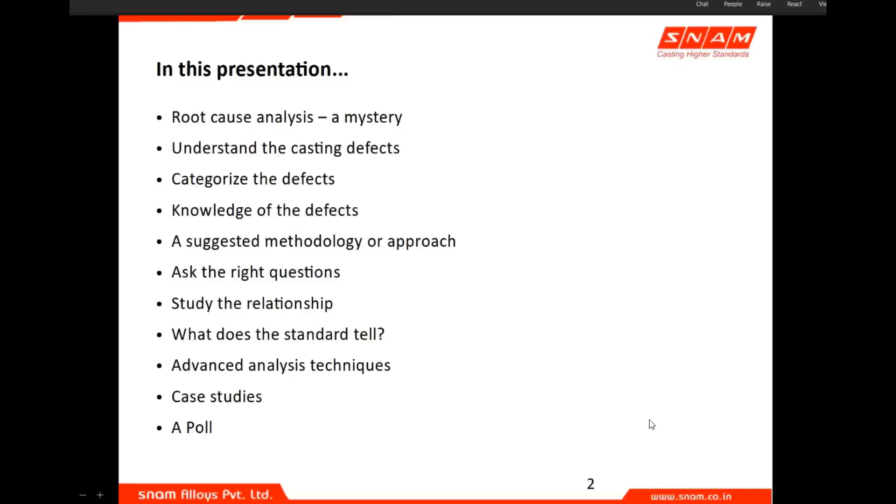And root cause analysis, the mystery. The reason why we call this mystery is because it is mostly considered to be person perspective. Say, for example, I think that this problem is caused by this root cause. So I start becoming confirmation bias.

See, the word confirmation bias means I decide that this is the most possible, or this is the most favorable thing which I decide with my intellectual knowledge. So I try to gather or grab all the information justifying that statement.

So if I do a root cause analysis, then what I think as the best cause becomes the major cause. If somebody else does the root cause analysis, what he or she thinks as the major cause becomes the most important cause. But it is actually not that, because the defect is not person sensitive.

And the casting process involves a lot of science inside, a lot of mathematics inside. A lot of chemical reactions, lot of physical interactions happening during solidification, during pouring, and the entire process scenario. So there is a lot of complexity in the process.

That is the reason why arriving at a proper root cause to solve a problem is always becoming difficult for any foundryman. If people have started their career as a recent foundryman, they find it very difficult because of the complexity in the process, and the basic knowledge they lack or have not acquired is making it more difficult for them to understand the defect and then take action.

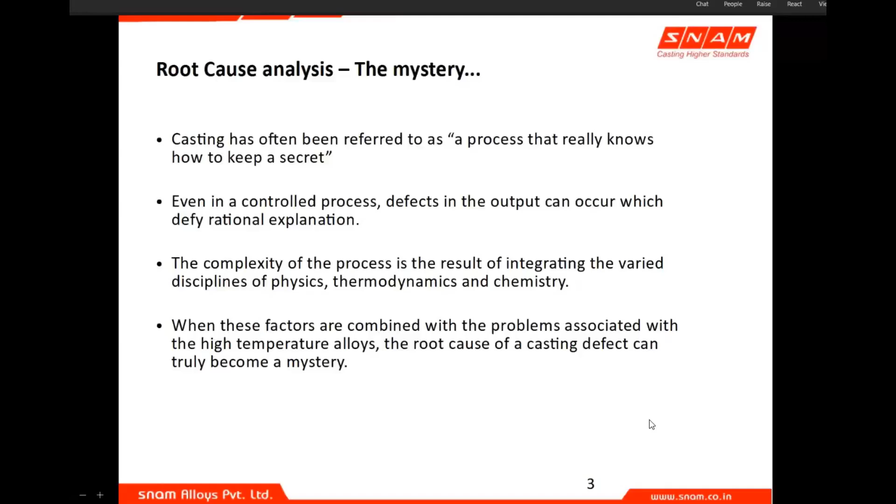And you have to understand the defects first. For example, when you want to solve something or when you want to set something right, then you should know what that is actually.

Sir, I'm getting an echo.

Okay, thank you. So casting defects are always very difficult to characterize because it's person sensitive or experiential knowledge sensitive. Say I call this as sand inclusion. I'm the most experienced person in this organization. I expect everybody else to just listen to me, and everyone should call that as sand inclusion only.

Or even if somebody else has got a different thought, I don't expect or encourage them to come up with their difference of opinion, telling that, sorry sir, I differ from you. This might be a different thing.

Or other way, with the experiential knowledge I've gathered so far, I always categorize whatever I look at or want to classify as a defect in the same way. For example, anything looking dull, I can call it as a short pour, a cold metal, or a cold lap. So I try to characterize the way I know.

But the problem is most of the defects are not just due to one cause, or it is not just one defect, one cause causing one defect. One cause might be causing multiple defects. There can be 2 or 3 defects combined together. One defect could have led to the formation of the other defect.

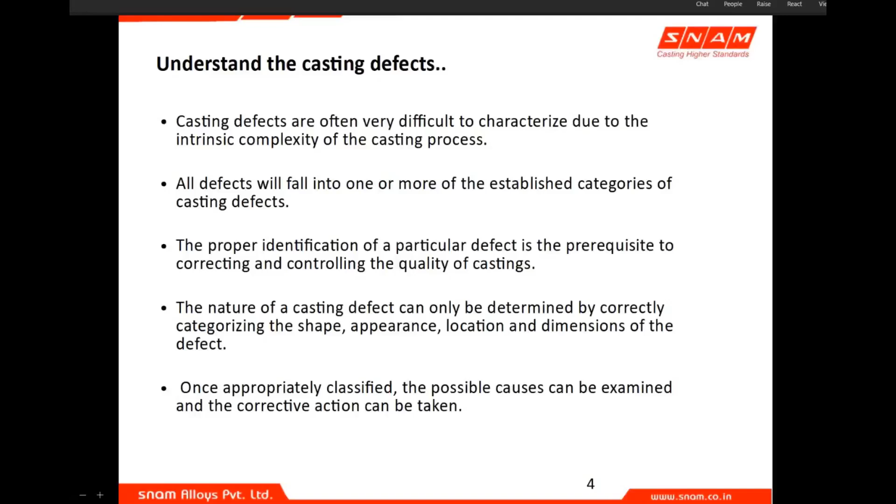Most defects generally fall into one of two categories. There are some similarities, some dissimilarities, opposites as we call them. So it is always best to understand the defect. To understand the defect, first you should know how to categorize it, so we can make a major classification between defects.

I'm not going to talk about sand defects, mold defects, metal defects. Any defect that comes up will be categorized as a chronic defect - meaning long standing, which keeps coming every time, a seasonal defect, or one that is prevalent for a quite amount of time.

But the other defect is random or uncommon. We often make a wrong assumption that some random defects are chronic defects, expected to happen again, and we start considering a random defect as a chronic defect. Sometimes you should just let the defect go.

Maybe the next day the defect might disappear, but that does not mean you should not do a root cause analysis. The way you treat a chronic defect versus a random or uncommon defect should be different. Standard set procedures need to be arrived at, because chronic defects are generally time bound, seasonal, process related, but random defects are not that way. Both categories should be addressed differently, but with set procedures.

So if a defect occurs, measures must be adopted to eliminate its cause and prevent its repetition. That is the baseline with which we should start any action.

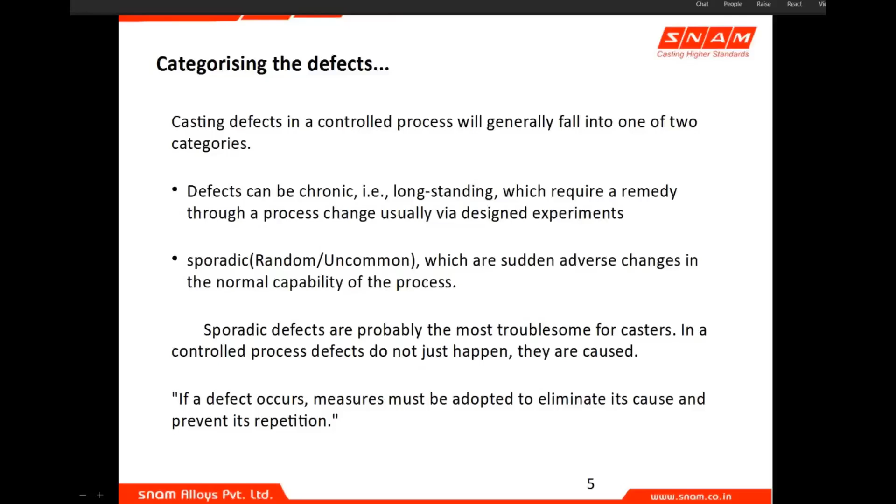Say your return sand temperature has increased today. So today you try to add some water, control or reduce the sand temperature for just the day or just the shift, and you run your foundry. This increase in sand temperature might lead to some other defect, like less strength in the mold, leading to erosion in the mold while filling. So you start getting sand inclusions, then other related defects. The strength of the mold comes down, very remote location shrinkage can come up. So one cover up can lead to multiple defects. We should always target understanding the cause of the defect, eliminate its cause, and prevent its repetition.

So some more about random or sudden defects - there are two journeys you should take in sporadic defects. Sporadic means uncommon or random defects, because chronic defects are, for example, during monsoons my humidity in the air is going to be high, so my moisture content in the mold is going to be high. So there is a high chance of all gas related defects. I take special actions such that I keep moisture in the mold less, and I preheat my ladle more, because there is going to be loss in temperature. So chronic defects, with experience, with learned knowledge, with textbook knowledge available, we can to some extent attack or control.

Because when the monsoon starts, I have an action plan already ready. I'll preheat my ladle twice.

I'll reduce my moisture, checking at increased intervals. I keep checking the moisture content in the mold, and I keep checking the permeability of the mold. So I've got action plans. But for this uncommon defect, I do not know what to do.

It might happen today. The moment I leave my foundry, my operator, or the second shift or third shift operator might call me telling that, sir, suddenly a defect has occurred. So for these random or sudden defects, we have got two journeys.

First is the diagnostic journey. That means you should understand the symptom, and that symptom should lead to a cause. The second journey is the cause to remedy.

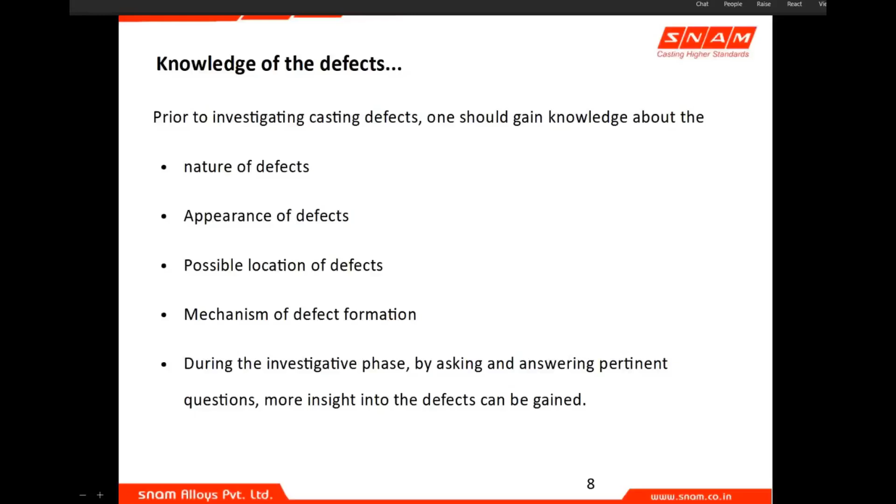So let us come to a typical methodology to approach a solution for foundry defects. You have identified the problem - problem identification is the first step. Who identifies the problem, how the problem is identified, plays a major important role. So the first thing is you identify the defect or the rejection, then you write the problem description.

Any wrong identification or wrong problem description leads to different scenarios. A problem description should involve every aspect of the defect - when did the defect come, when was it found, how much is the defect, what is the severity of the defect, in how many places it has occurred, since when it is being observed. So a detailed description of the defect is needed.

You would have seen some reports of doctors where you have got a small summary that takes up everything. Say for example you meet with a small accident - hopefully nothing like that should happen - you go to a doctor for first aid, and the doctor starts asking you whether you're feeling giddy, are you feeling pain in any part of your head, do you have any bleeding from your ears, or do you have any breathing difficulty. So these kinds of questions come up and they record everything. The report will tell that okay, this person came at 9:39 a.m., these are the questions asked, these are the answers given by the patient, and it will be recorded.

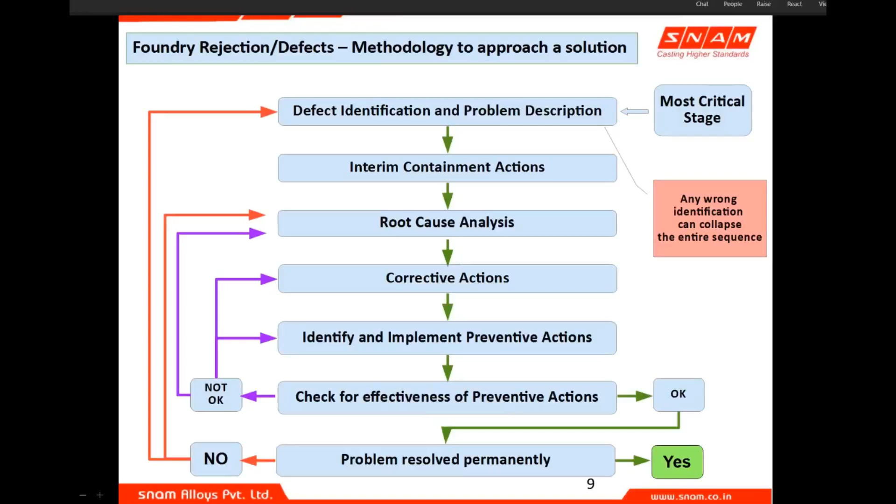You are going to have a team where the problem description is to be understood by the entire team, and a group of minds are going to work in solving a problem. If you think you are the only person who can solve all the problems, that is not possible, because if you start thinking in that way, then you become the biggest problem in solving the problem. So the problem description is to be made in such a way that anybody who is going to become a part of that problem solving team is going to understand the exact picture the way you have understood it.

Okay, next comes the interim containment actions. So you have identified...

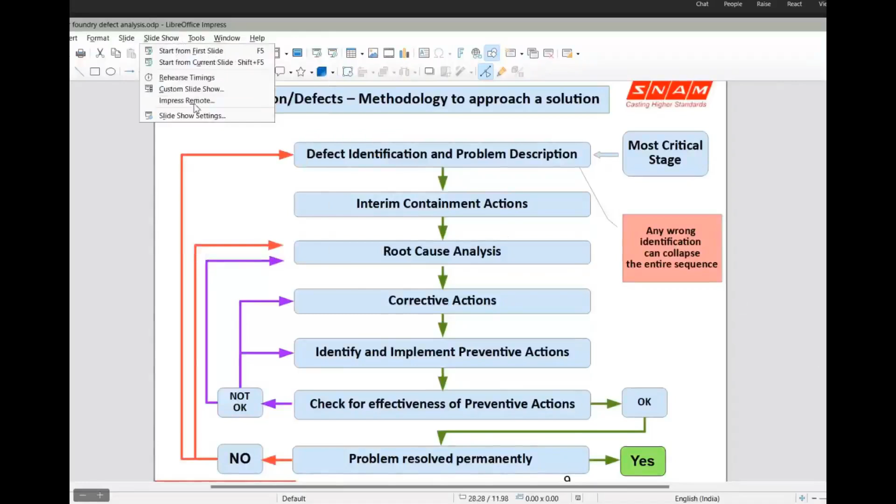Okay, fine, yes sir. Okay, so next comes the containment actions. A defect has occurred, you identified the defect and you made the problem description, everything is available. But you should act immediately, because you cannot keep your process continuously producing rejection. You take an interim containment measure, you stop pouring or you segregate all these castings. That is just to ensure that the further processed item is not getting affected. So that is not the solution. You understand? Removing this defect or slowing down the further causing of defect is not the solution.

So this is called containment action. Say, for example, you found suddenly very high magnesium or poor nodulity identified in one particular pouring. What you do is you immediately cut down, you move all the castings outside the line so that it does not get messed up.

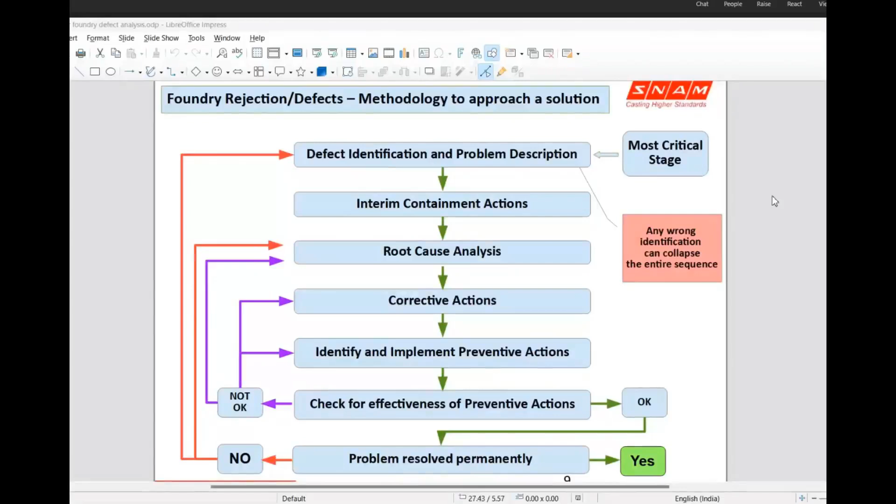So then you should ask the right questions, as we were discussing in the previous slides—always ask the right question. Where are the defects? Is the defect on the drag side, the side walls, above the core, or below the core? You try to understand the technicality, appearance, or location of the defect so that you will be able to stratify it, as we were discussing previously.

If you stratify the defect, you can categorize it, and when you categorize the defect, you can easily arrive at a root cause. Are the defects found at the same location? Are you getting defects continuously at the same location with the rejected castings or process items? Are the defects occurring all the time—is it a chronic defect or a non-chronic defect?

Are the defects people related? For example, the defect has arrived at a place where more laborious work is happening, so a lot of people are involved in that operation or process.

And are the defects time related? Has it happened in the daytime or the night time? Is it related to seasonal changes happening during monsoons or not? Or are the defects cavity related? If my casting or mold has multi cavities, is the defect particular to one of them? So you should have a defect pattern.

Defect severity or defect occurrence—without that, you should not start doing any kind of analysis. So do these occur in similar jobs? This is horizontal deployment and horizontal checking—you check whether such kind of defects have occurred in another kind of casting or similar kind of jobs also.

Sir, I request. Yes, thank you.

So there are some related defects. For example, misrun, short pour, run-out, laps - these are some kind of related defects. Also rat tails, buckles, scabs. So you either see one defect or its related defects available. When related defects are available, you can identify that as a clue to arrive at a root cause. For example, you get a scab - scab is a penetration defect.

When you have a penetration defect available, sir, I request, let me complete the presentation and we'll take the queries further, sir. Thank you.

So when you have any related defects available, say I was talking about a scab. When you have a scab available, and if the scab is of an erosion type, then you can definitely...

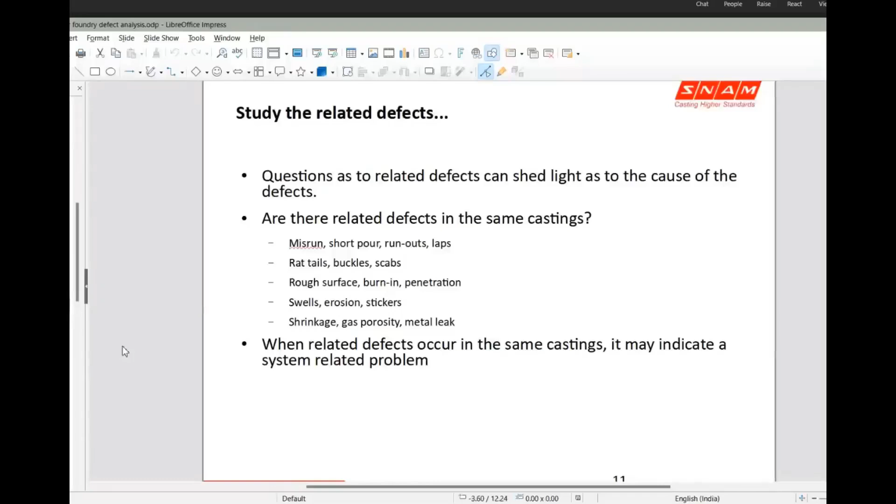When related defects occur in castings, it may be an indication of a system related issue. I happened to go through an Indian standard which talks about controlling foundry rejections, where there are guidelines available for controlling foundry rejection. It mostly talks of grey iron castings, and the standard number is IS 12880:1989. It is available on the internet, and anybody can download it.

What this guideline tells is, it has already talked about the attainable foundry rejections which is possible. As Kumar sir was talking about rejection levels at the start of this presentation, this standard says attainable foundry rejection is 5% max, and attainable machine shop rejection is 2% max. Of course this pertains to grey iron castings, but it talks of a process for handling foundry rejections.

So it gives some indication of achievable rejection levels, and it talks about on what basis you should be reporting a rejection, the reporting rejection system, and it talks about what the method card is and how a method card should be, and what all it should contain.

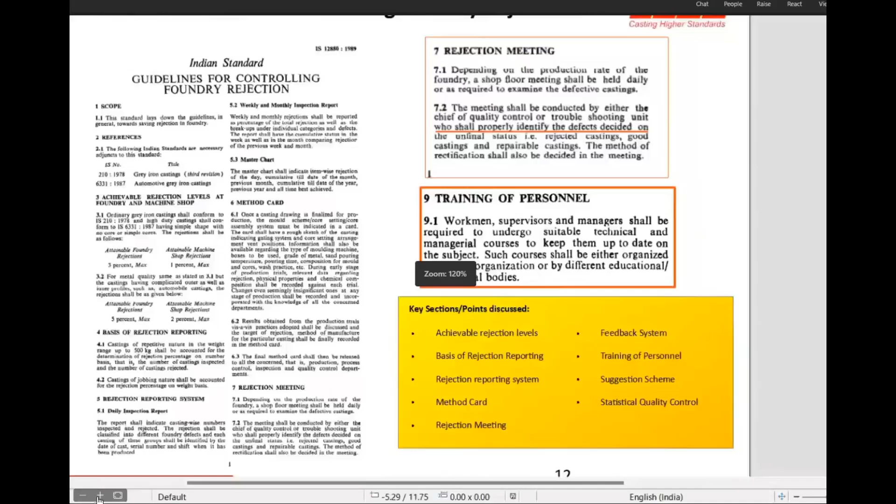Then it says how a rejection meeting should be conducted and who should conduct it. It also talks about the feedback system after the rejection meeting, training of personnel, suggestion scheme, and statistical control. What this means is, even if after having a rejection meeting and a feedback system, the rejection is still not solved, it's like this: you make a bounty and say whoever solves the problem will get a prize. So you can have a suggestion box even to solve a defect - it need not be just the core team.

And it talks of training the personnel. The exact lines mentioned in the standard are: workmen, supervisors, and managers shall be required to undergo suitable technical and managerial courses to keep them up to date on the subject - the subject meaning controlling foundry rejections. Such courses shall be either organized within the organization or by different educational or professional bodies. I think that is what is being done right now.

Thank you. And how should a rejection meeting be conducted? The meeting shall be conducted by either the chief of quality control or the troubleshooting unit, who shall properly identify the defects and decide on the final status of the rejection. That means you should not conduct the rejection meeting before identifying the defect or deciding what it is called. So if you don't identify the defect, you should not even conduct a rejection meeting.

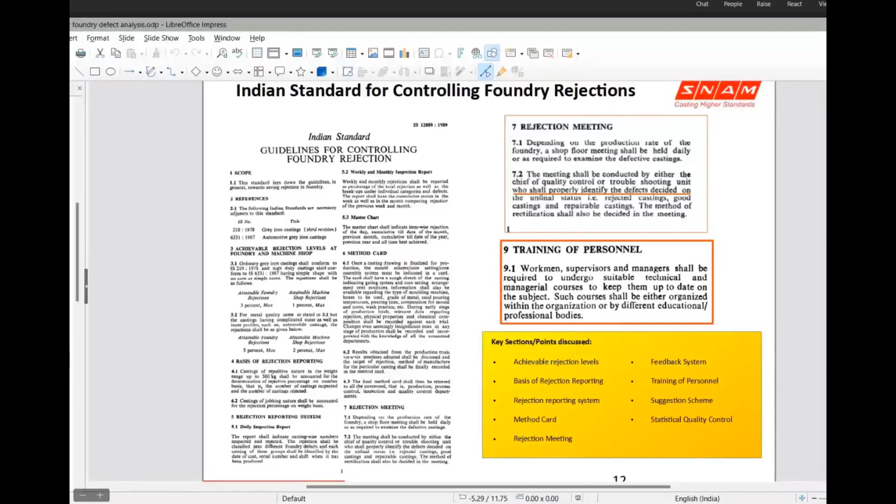This is what the standard tells. I think it is better - this standard has been arrived at through so many iterations with so many thoughts coming up. So if we just go by the standard: understand the defect, identify the defect, name the defect, do the problem description, and only then conduct a rejection meeting, because only then will you start getting the fruit of the meeting.

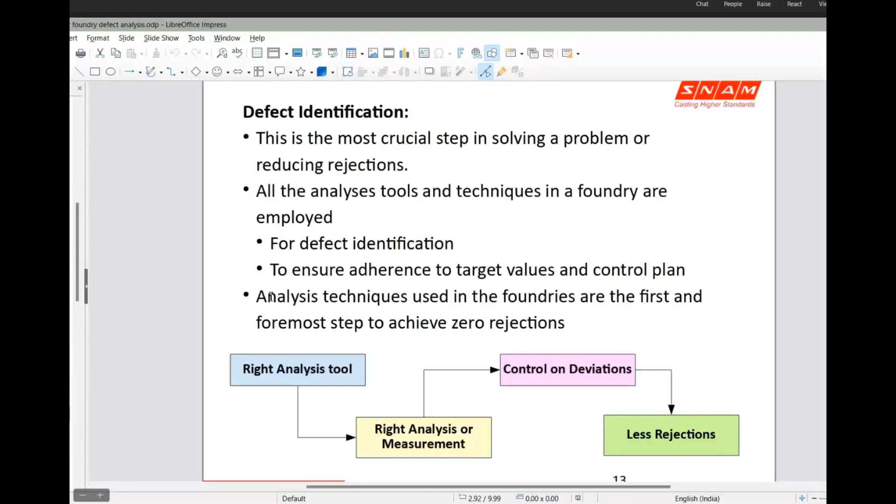Identification of the defect is the most crucial step. You should have the right analysis tool, or the right analysis measurement, that will lead to control on deviations, and that can lead to fewer rejections coming up.

The different types of analysis generally conducted in Foundry: one is subjective, the other is objective. Subjective is generally by experience. With my experience, when I feel or touch this casting or this part, it looks like a rough surface to me, so this can be a burn-in defect or a burn-on defect. That is by experience.

Or you use some scientific tools, for example a spectrometer or a microscope, tools to measure. If you have tools available to measure, then it can be a quantified measure, and that can become evidence of the analysis or the identification of the defect.

Factors which can generally influence subjective analysis: eyesight. The way I see or the way I feel generally decides, or tends to decide, what the defect actually is. And positional hierarchy, sometimes, as I was telling previously, if my boss generally tells this is a defect...

I somehow feel that I don't want to defy my boss, or the person who is above me, so I just go by his words. Let me try the way he has already told, or already decided. It might be that the junior would have identified the defect in the right way, but it is not coming out.

Environmental conditions: illumination, or the position where you keep yourself and analyze, matters a lot. Skill level, because training on identification or classification means you should have already forecasted that such kinds of defects might come up, and trained your workforce to identify and classify the defect. If that is not there, subjective analysis will always be biased, and it can lead to wrong defect identification.

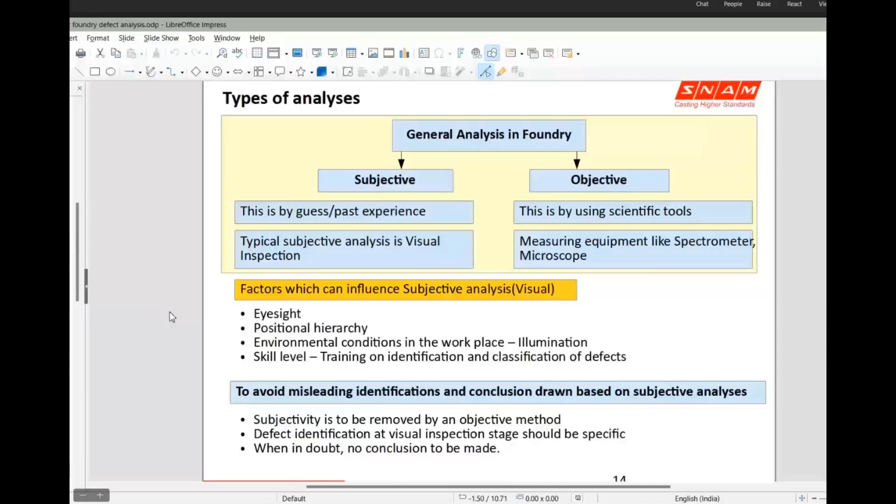The category of analysis generally conducted: you do a chemical test, a metallurgical test, and a mechanical test. This classification is generally related to liquid metal or castings, and a similar kind of general analysis also happens to sand or other raw materials.

For chemical analysis, you do a chill wedge test. You could use this chill wedge test with experience to arrive at the carbon equivalent in the past, but now we have good spectrometers and other techniques available. You use a CE meter, wet analysis, spectrometer for chemical analysis, and the same chill wedge to predict the microstructure or look at the chilling tendency.

Use an optical microscope to analyze or study the microstructure of the castings. Then for mechanical testing, you do hardness, tensile, impact, yield — all these properties you measure. These are the general things available in a Foundry to do analysis.

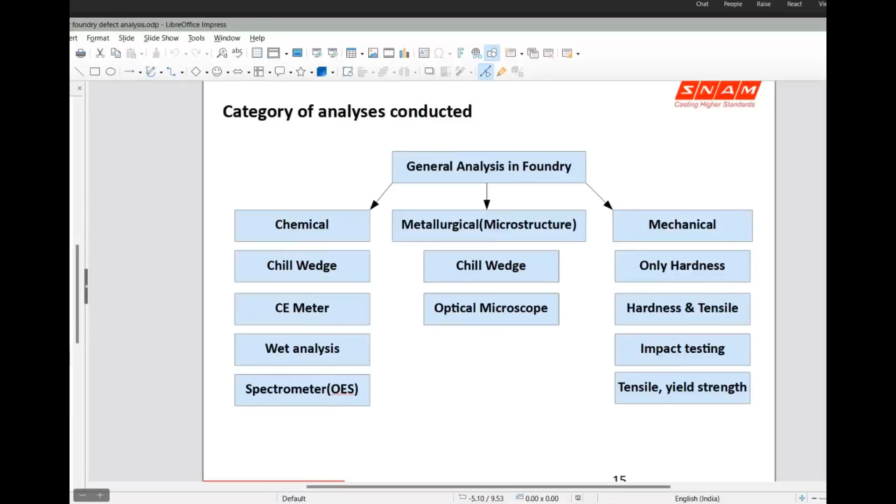What is generally analyzed in Foundry with respect to liquid metal and casting: for chemistry, you measure the major elements, sometimes trace elements also, but most of the time not calibrated. For metallurgical microstructure, we look into the graphite shape, size, matrix, and carbides. For mechanical, you check hardness, tensile, yield, and impact at room temperature.

Some customer requirements impact low temperature analysis also. So these are the analyses already available with customers or at the Foundry.

Even after having so many techniques, so many quality control levels of checking available, why are the rejection rates still high? This tells us maybe the existing analysis tools are not adequate enough, or not competent enough to identify or diagnose the defect which is coming up. The identification of the defect or issue is not done the right way, or the deviation is not measured properly, or it is not being used in the proper way to control the deviation.

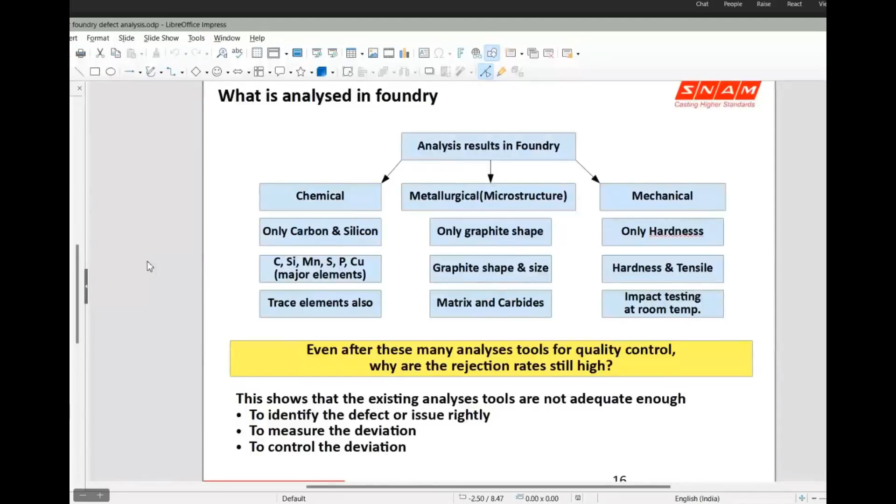So what you can do to overcome this is use advanced techniques available. Say you can do EDAX, or with respect to chemical composition, you can do a cross check sometimes using a LECO carbon sulfur analyzer. You can cross check this with your existing spectrometer, your existing CE meter, your existing methodology of arriving from the chill wedge leading to a carbon equivalent. You can have a cross check of all these things, a cross check of your OES analysis, and a cross check using your electron microscope.

The reason I'm emphasizing on analysis technique is because these analyses will lead to a number or an attribute, yes or no, or some numbers. Using those numbers, you identify or stratify the defect. If the defect stratification is done right, and you have a measure to quantify the defect, then you will arrive at proper corrective and preventive actions. So these are the different types of advanced techniques available generally with respect to castings, which can help you in addition to your existing analysis.

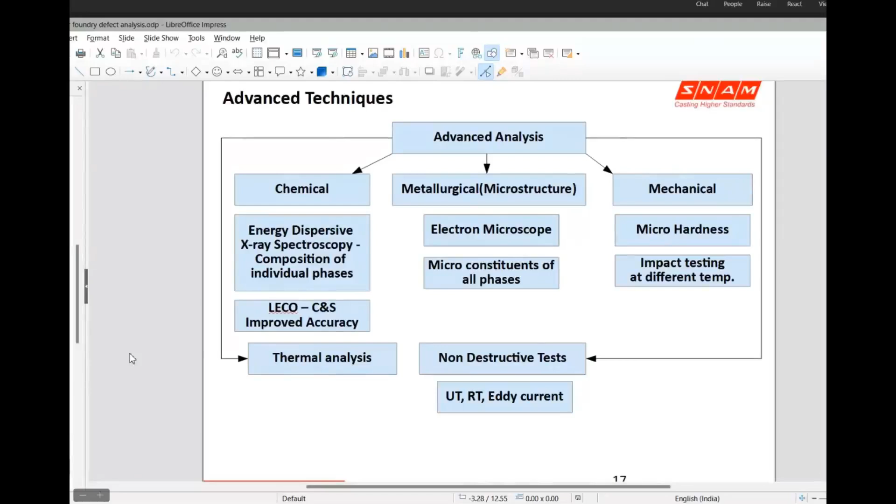So I've got two case studies with me right now. I'll share the experiences which I had faced, and how we overcame those experiences.

I'll talk about the wrong identification of a defect. This is the defect casting piece which came to us for analysis, and it was written previously when the sample was received, stating that this is a slag inclusion defect which occurred at the Foundry, and asking us to analyze what this slag is. So this is the problem statement given by the customer along with the casting sample.

So what we did is start analyzing this with a deeper microstructure analysis technique. We have a scanning electron microscope at our R&D center, so we can actually look into the defect deep inside the cavity, which is generally not possible in a conventional foundry. So we went to the actual inside location of the defect, and this is what it is actually looking like.

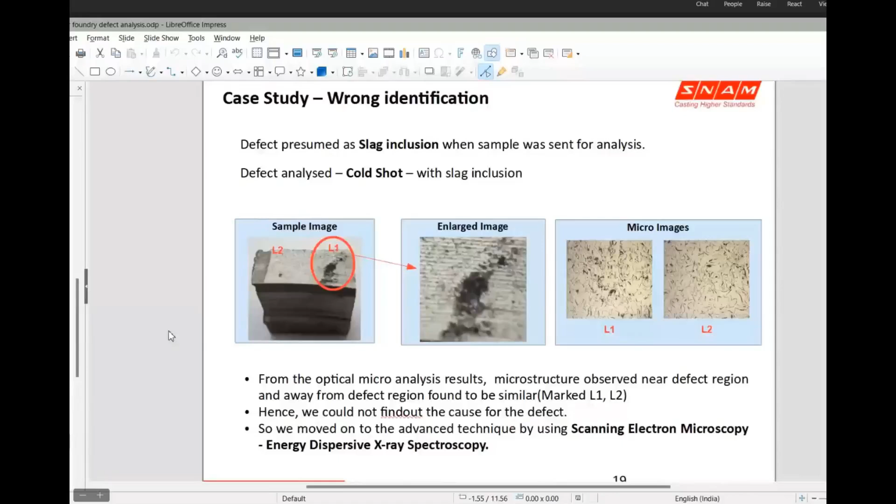When you go into this defect, you start looking at the graphite flakes, these lines here, and the marked area I've analyzed into 3 locations. You see a ball, like a sphere, a metallic material inside, and then another small spherical material inside. This is the good region, away from the defect. When you compare all 3, you see iron, silicon, aluminum, oxygen and carbon. So this analysis additionally tells me, okay, this is mostly iron, about 87%, with some carbon, oxygen and silicon. It is not a different material, it might be close to the parent material.

So making these observations, the defect cavity has got a spherical nature inside, and it is a cavity. So it is a cavity defect caused by what? We arrived at the conclusion that the morphology is spherical shape, the composition is found to be similar to the parent material, and the defect is a cold shot.

So the reason why we arrived at this conclusion is based on the available knowledge and information. We identified it as a possible cold shot because the morphology of the defect deep inside matches that, and the source could be a change in turbulence or a different initial velocity. These defect tools are generally not available in existing microscopes or conventional methods.

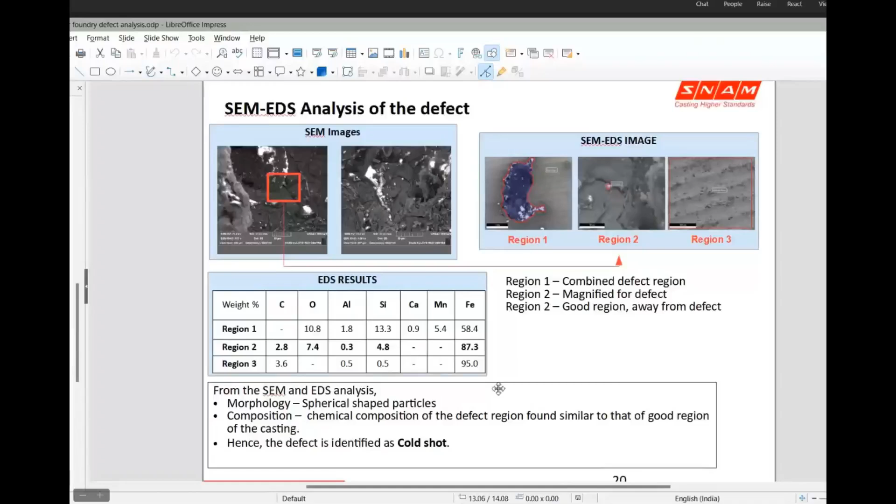What generally happens is when you do a wrong identification of the defect, your root cause analysis becomes wrong, and you keep spending a lot of money but the problem is not solved. But when you identify the defect correctly, you do the right problem solving and eliminate the defect. This is how wrong versus right identification of a defect can lead to very different outcomes.

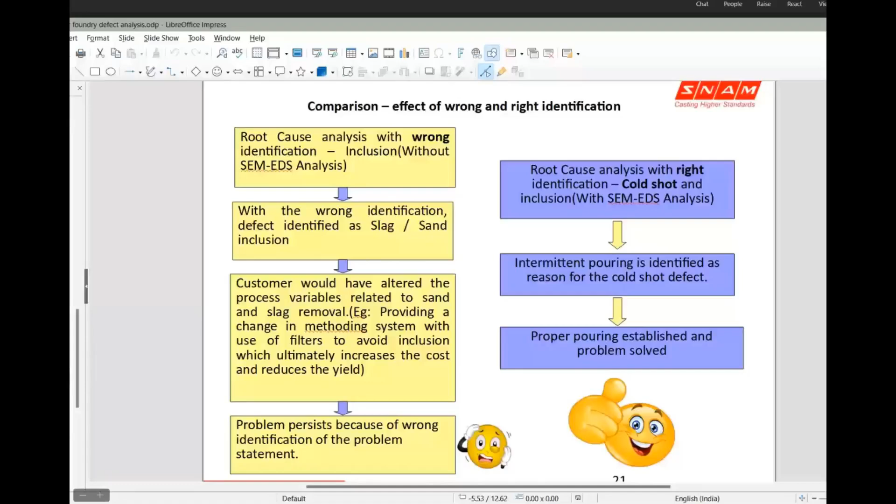Another scenario is a case study about a crack in a casting. This is a gray component, and the defect mentioned was a crack in the as-cast surface, before machining, in a location with no machining. The customer identified the crack visually and wanted to do a metallurgical analysis to find the root cause of the crack.

So we did a conventional microanalysis, and it revealed some information. You can see pockets of type C and some chunks of type C microstructure, predominantly type A, with the balance being type C, and it's predominantly pearlitic with no carbides available. But when we did the analysis, we found traces of steadite available. There's some amount of type C, some amount of steadite. This is what I've analyzed with my available facility. Yes, this is the information.

Does this lead to a crack by itself? That's the next question. Gray cast iron might have some default phosphorus in the system, or because of the section thickness of the casting, type C might be allowed since I don't know the customer's or end customer's requirement. So I cannot conclude that because type C is identified, with some steadite at trace level, this will lead to a crack. These are just indications available. This might be leading to a crack, or it might not be the start of the crack, but it could let the crack propagate. The source of the defect is not these microstructures, it's not evidence-based on microstructures alone, but if the source was something else, these microstructures can let it penetrate through.

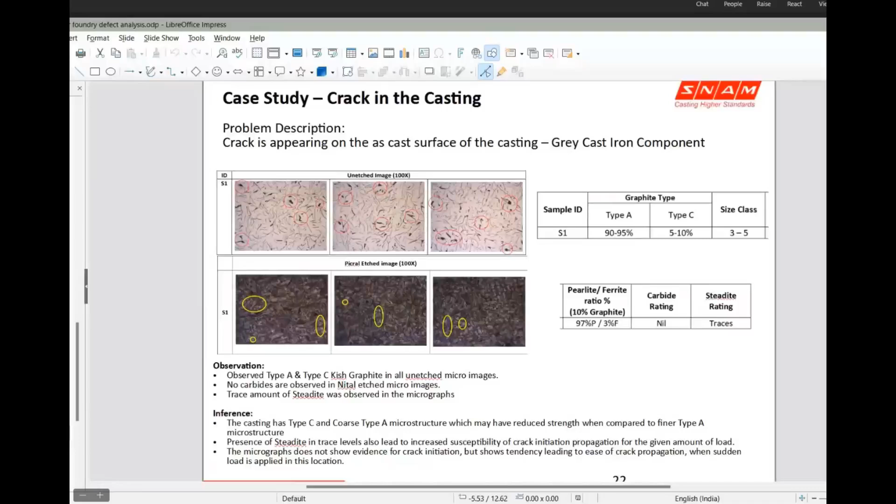And I just want to explain the perception about advanced techniques available. What people generally think about advanced techniques is that it is about the analysis technique, it is about the resources available, sending for training, investing in training. Okay, all these things are advanced techniques, let us call it advanced technique.

People always think that it is costly, but it is less costly when you compare it with the cost of rejection which is coming up. Cost of rejection is not just the cost of rejection, it is the credibility of your name at the customer's place. Might be next time the customer is not going to believe you and is not going to give you a repeat order.

So that is more costly than the cost of a training or the cost of an analysis. People think that it is time consuming. No, it is not time consuming, it is systematic. There is a minimum time which is to be consumed by the system or the process of defect analysis to solve or rectify the problem.

If you think a solution can be as quick as a snap of a finger, you think it is wrong, or it is not the right solution, or you're trying to cover up something. The time consumed by various trial and error methods is actually a bigger time loss. Say, for example, I make 3.1 carbon, 3.2 carbon, 3.3 carbon, 3.4 carbon, that is a waste of time.

I cannot do so many trials at my foundry. So I invest in the analysis techniques or advanced techniques available by training or by knowledge gathering, such that I take minimum number of trials and then solve the problem at the earliest.

It's not available at all places and cannot be afforded in a foundry. Yes, it might look expensive to the foundry. Sometimes people think that it is not affordable for the foundry, but this is just a one-time investment.

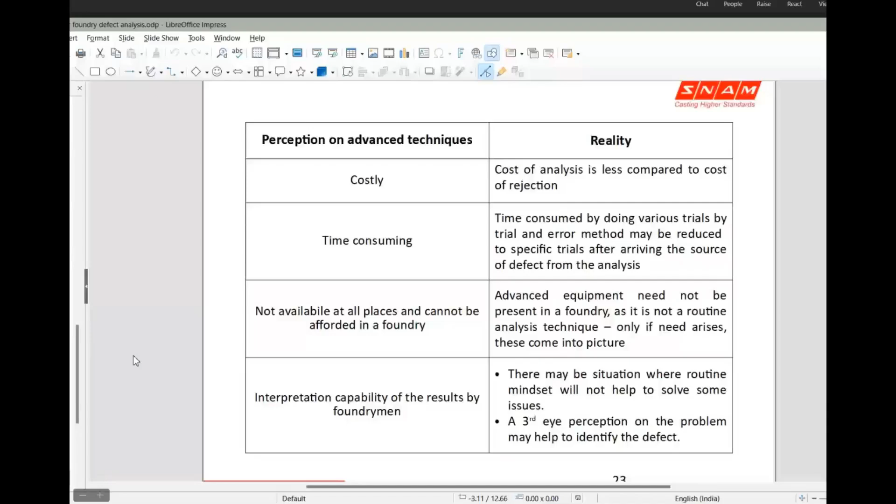It should be more refined. You should be able to pinpoint all the defects, or all the causes possibly. You should be able to list down all the causes possibly, because the world is growing, and you cannot say that no information is available today. And always a third eye perspective will give you a new scenario. It might confuse you, or it might guide you in a different way.